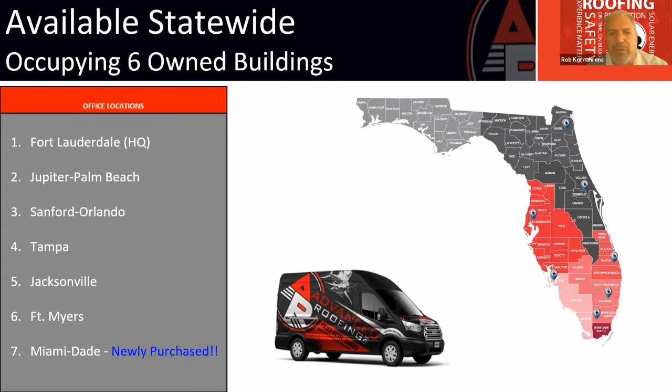Good morning, everybody. My name is Dan Huntington, and as Robert said, I'm going to be talking to you guys about OSHA requirements in rooftop fall protection.

A little bit about me. I like that Robbie's from Long Island, New York. I myself am from Buffalo, New York - we call it the frozen borough. I've been in fall protection for about 10 years, coming up on 10 years. And the majority of my time is spent up on roofs, identifying hazards and coming up with solutions. There's a lot of consultants out there that are able to say, hey, you've got a hazard. Well, yeah, no doubt - how do I fix it? Right. So that's what my focus has been: what does OSHA require, and then what can I do to address that hazard? And we're going to talk about that today.

A little more about me. I've gone through pretty much every OSHA training regarding fall protection that I can find. I have Train the Trainer awards, IOSH certifications, and training in work at height risk management and work at height rescue. I've written articles published by OHS Magazine, EHS Today. I host an annual webinar like this one for EHS Today. I was a speaker, a virtual speaker at the 2020 Western Roofing Expo. And I've been tasked to work as a professional, or an expert witness, in a fall protection case most recently. So I've been in fall protection for a long time. This is my passion, and I'm excited to talk to you guys about it.

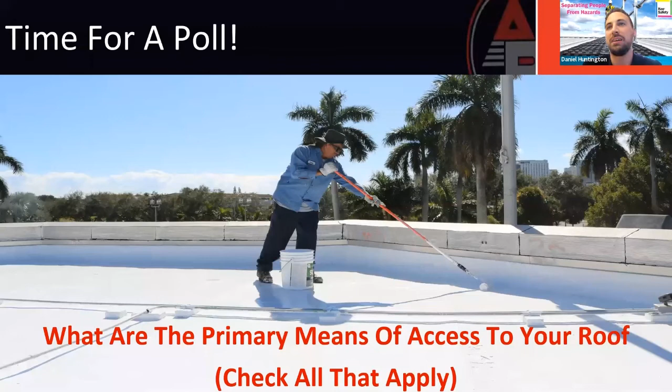But first, we want to send a poll out to you guys. What are the primary means of access to each of your roofs? Are you getting up through a hatch? Are you checking, going through exterior fixed ladders, stairwell penthouses, or hot air balloon? That's very clever. So pick whichever one applies and let us know in the polls.

Once we get the data back, what I want to say is most people use hatches and fixed ladders, some stairwells, which is exactly as I would see it. It's typically split between fixed ladders and hatches. But what does OSHA have to say about those fixed ladders and those hatches? That's the real question.

Let's break it down. It says that each employee must be protected from falling into a ladderway floor hole. What is that? That's a hatch, right? It's where the floor or the roof is acting as a floor that you're going down below. So if you have a hatch as your access point and you don't close the lid, because no one ever closes the lid since we don't want to get locked up on your roof, it has to be protected. We'll talk about how.

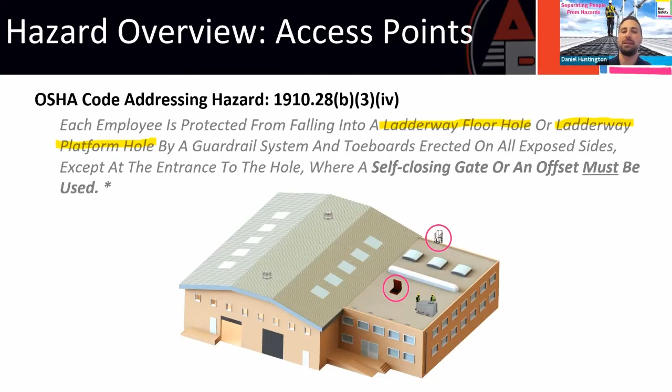But the real question you guys have is, well Dan, you've been doing this 10 years and you're saying that this is the number one priority, I need to protect this one first. What about the leading edge, right? Well, we'll get to the leading edge, but first, let's understand how we even talk about risk.

Yellow is moderate, red is critical. I am focused on critical hazards in this presentation.

Let's think about fall protection. Any hazard is going to be a 5 on potential severity, okay? In general industry, the minimum threshold for a fall when fall protection is required is 4 feet or higher. You guys are probably thinking, no, you're wrong Dan, it's 6 feet. It's 6 feet in construction, 4 feet in general industry.

So let's say you have a fall that occurs at 4 feet high. You're a 6 foot tall person, your head is 10 feet above the ground. You fall backwards and land on the back of your head. That is a potentially debilitating injury. So even at our lowest threshold, we're at a 5 in fall protection all the time.

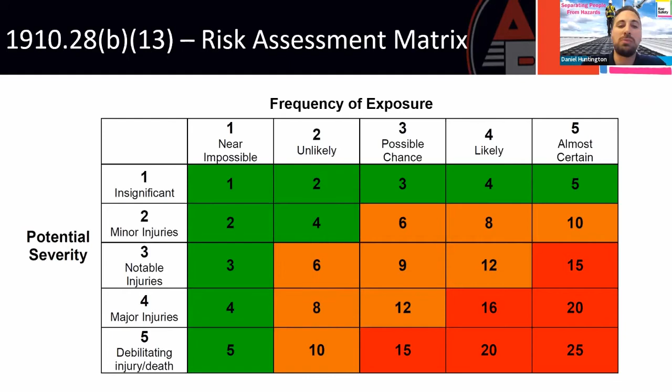So the question becomes, what hazard on the roof am I exposed to most frequently? I'm going to give you guys a quick example here. You guys can pick it apart if you want, but just go with me. Our primary access point is going to be that hatch, and on separate occasions I have to service this unit twice per year.

I have to change out the belts in that exhaust fan. 4 times a year over at this exhaust unit near the roof edge, I need to change out the filter, so that's 4 times per year, separate trips. Twice per year I'm cleaning out those drains - one's in the spring, one's in the fall. And then once a year I've got to go up and recaulk those skylights, because skylights are always causing problems. So the question is, which hazard am I exposed to the most frequently?

I've done this example hundreds of times. Sometimes people say, well, the edge right here, 4 times - that's your most frequent hazard. Yep, I get it, but it's not the right answer. Some people are aware enough where they read the title up here that says access points, and they say, oh, the access point must be the answer. And they say, yep, that's correct.

But what's my exposure count? How many times am I going up? 2 plus 1 is 3, plus 4 is 7, plus 2 more is 9. Oh, I'm going to be exposed to this 9 times. No, you're actually going to be exposed to it 18 times.

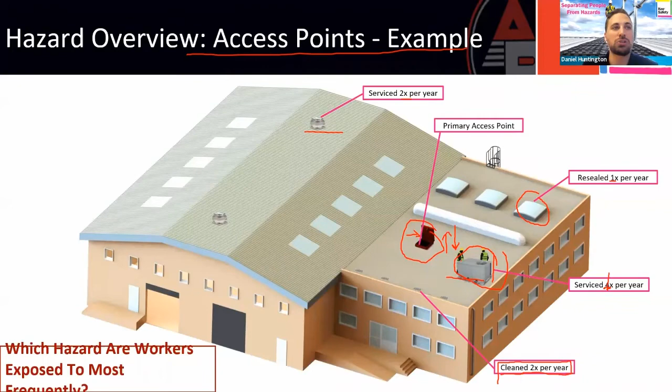Now there's one more thing we have to clarify here, and this is for our OG OSHA aficionados. The question is, can I use chains to protect a ladder opening? I see it all the time walking through facilities and plants where people are saying, hey, I don't need to put a self-closing gate on that access point - I've got a chain up there.

OSHA says that chains are at least as effective as a gate. The answer is that that's not true anymore. Back in the 80s, OSHA wrote a letter of interpretation saying they believe chains provide protection at least as effective as a swing gate, and so you could use a chain instead of a swing gate.

In this new code, 1910-28, which came out in January of 2017, they use the term self-closing gate. You have to have a self-closing gate to protect your opening. So if I have a self-closing gate, can I still use a chain? The answer is no. Their explanation, straight from the Federal Register, says OSHA believes that double chains do not fully protect workers from falls at hole entrances, and is therefore adopting the requirement that platform holes have self-closing gates or be offset.

So think about how you're getting onto your roof. Think about any ladder in your facility. When you get to the top of that ladder, or to the top of that hatch, what does it look like? Is there a gate at the top? Is there guardrail on either side? Is there railing around that hatch? If the answer is no, it needs to be addressed. It is a critical hazard that needs to be protected on your roof.

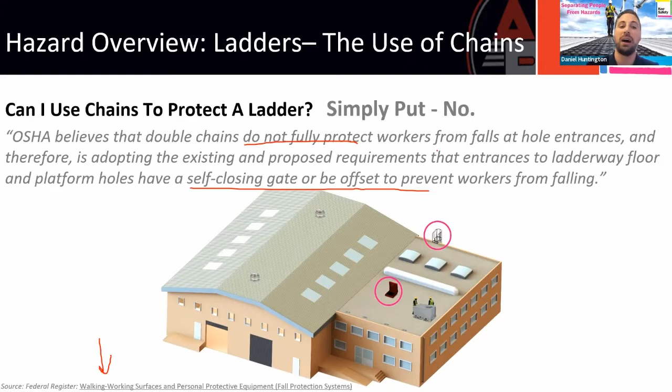So the question becomes, how do we protect it? Very simple - we provide a solution called Kee Hatch, available through Advanced Roofing. They know all the details needed to safely install it, attaching it to your hatch without voiding your roof membrane warranty, without poking holes in your roof.

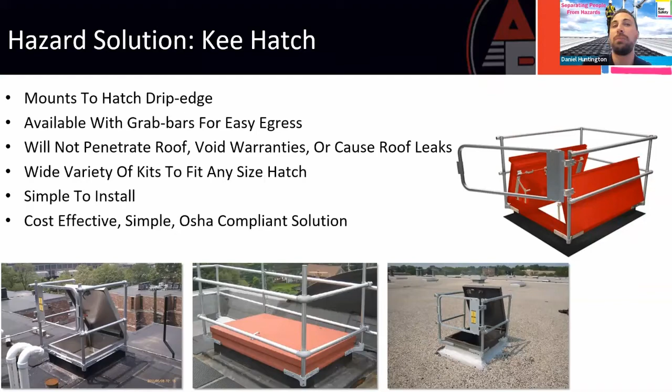If you have a fixed ladder, how do we address that? Again, very simple - we have a guardrail system that protects either side of the opening, with a self-closing gate in front of the opening, and a guardrail that won't poke a hole in your roof or void any warranties. This is also available through Advanced Roofing.

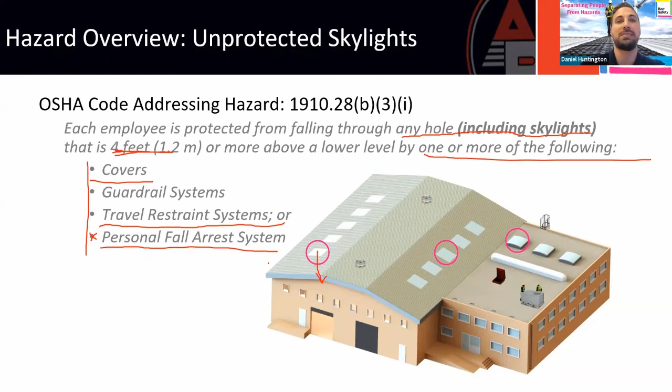So when it comes to protecting skylights, the best options are a cover. We provide a screen as your cover, so we allow light to get in. Again, we provide non-penetrating attachment to the curb—we don't put screws into your curb, because we don't want to damage your waterproofing. That's why it's so critically important to work through somebody like Advanced Roofing to make sure these are put on properly.

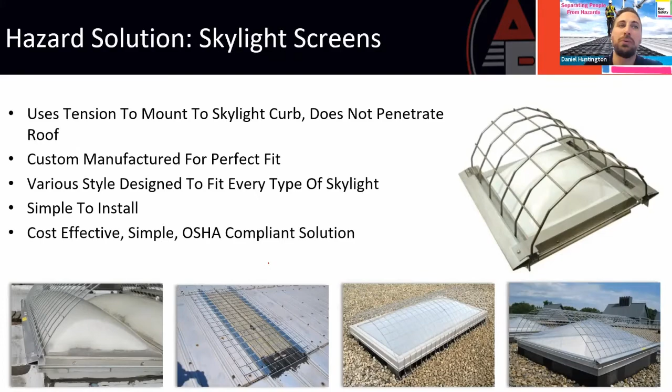Or a KeeDome railing system that goes around your dome skylights. The railing goes around the skylight, so it's not a cover—it's protection around it. A lot of times people will upgrade to this solution when they're worried about shading. So if you have a foyer or an open skylight over an entrance into your building, you don't want that grid pattern shading on the floor as light shines through. So you just put a guardrail around it to avoid that shadowing on the floor. But either way, both are a great option—both are OSHA compliant to protect workers from falling through your skylight, which again is statistically more likely to happen than falling off the edge.

So thinking about your building—we have 60% of you where it doesn't matter, you don't need to worry about this. The remaining 40%, especially that 20 or so percent that had more than 12, think about the skylights on your roof.

Think about the proximity and work that you have. Think about the walk paths on your roof. Are you opening yourself up to potential liability of somebody falling through that skylight and being seriously injured? So it's a moment of reflection to think about your site.

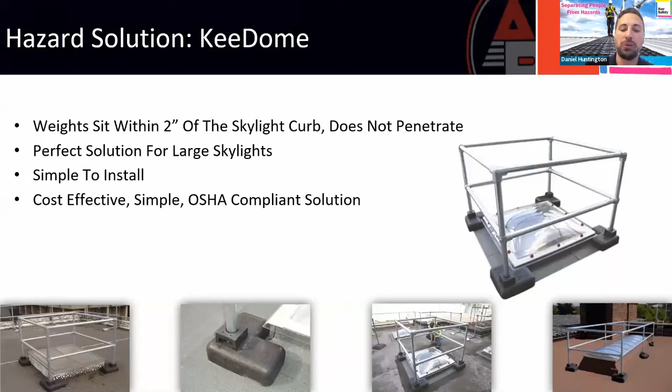Moving on, this is the number one question people ask me to protect: the leading edge on your roof. People are always wondering, on the roof, what should I protect? Who do I need to protect? What solutions can I use? And I'm always saying slow down. How are we going to get to the edge first? How do we get onto your roof? What's the path to get to the edge of the roof to service that equipment?

Let's look at the code: 1910.28 (b)(13) subpoint (i). This is when work is performed less than 6 feet from the edge, what I just delineated as a critical area on your roof. It states in the code that the employer must ensure that each employee is protected from falling. And then they give us 4 options in this zone: guardrails, safety nets, travel restraint, personal fall arrest. So it's very clear, if you have somebody working 0 to 6 feet, you've got to protect them using something.

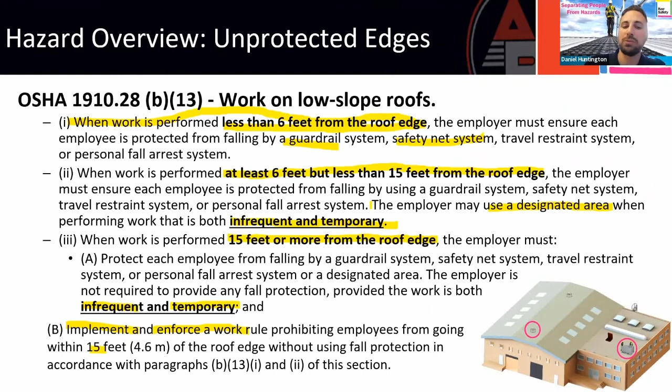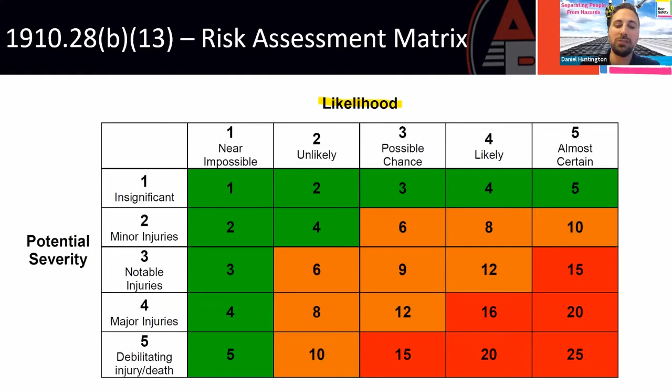But we still have some terms to define. We've already seen this graphic, looking back at our risk assessment matrix. Tying it back to what we talked about in the beginning, this term 'likelihood' is what everybody gets tied up on. If we simply switch 'likelihood' with 'distance from roof edge,' it's simple — the closer I am to the roof doing my work, the more critical it is as a hazard, and the higher it is on my priority list.

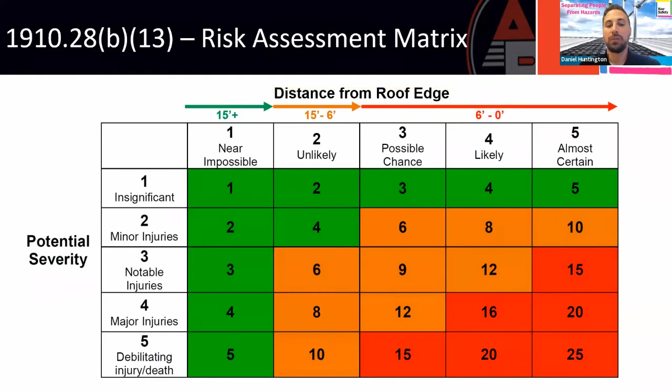So if you bring me in and ask, Dan, what do I need to look at here? I'm going to say your access points, your skylights, and any units within 6 feet of the edge. That's the bare minimum we need to get done right away. In those areas, you're one accident away from a severe injury, and you're leaving yourself open to huge risks when it comes to lawsuits.

Required definitions: temporary and infrequent. If your task is temporary, it takes less than 2 hours according to OSHA. Infrequent is typically considered quarterly — I think monthly is very frequent. So typically quarterly; if you're going up on your roof more than 4 times per year, it's pretty much frequent.

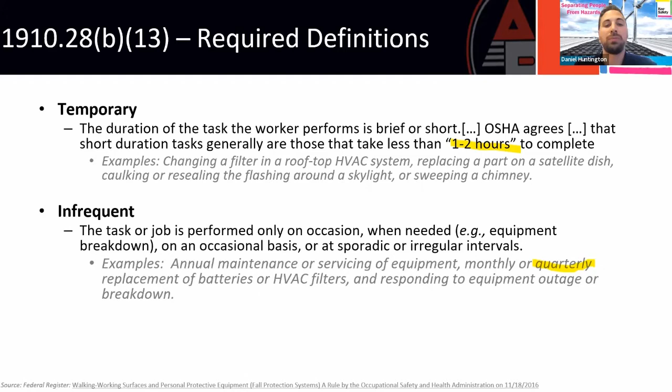As far as solutions are concerned, we have a railing system that will not penetrate your roof to protect those edges, meeting the OSHA requirements for guardrail. Everything we do is hot dip galvanized inside and out. Florida is an extremely corrosive environment, so we only use the best possible solutions for corrosion resistance to meet the quality you're getting on the roof from Advanced.

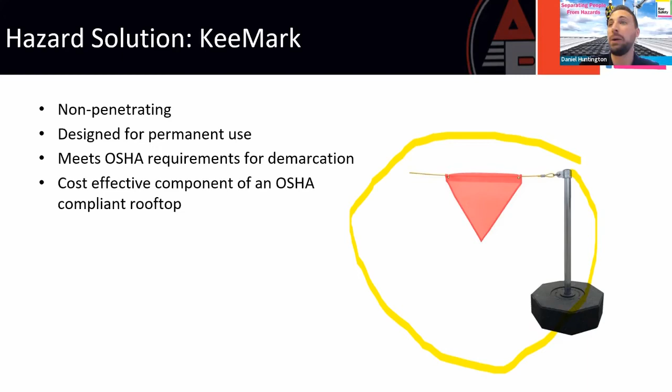When it comes to designated areas, a simple warning line is very easy to put up, minimum 6 feet away. I actually recommend putting it 10 feet away. At 6 feet, if a guy who's 6 feet tall falls against it and takes 2 steps on his way back, it's not really going to do anything. So technically we're meeting code, but that 6-foot distance from the edge is really a bare minimum.

And if you decide to go with anchor points and lifelines, a good alternative to a full engineered system mounted into your structure is this simple non-penetrating anchor point set up on your roof. I like to use these in areas where, hey, all my units that I'm servicing have guardrail around them, but there are certain areas — maybe cameras or lights on the edge — that I only need to service on occasion. We have this on the roof and you can move it around to the places you need once a year. You just leave it up there and you can move it. You set it up behind the 15-foot mark, tie off to it, and go beyond the 15-foot mark — that's a good way to design it.

So as far as your primary needs to protect on your roof, these are the most critical areas.

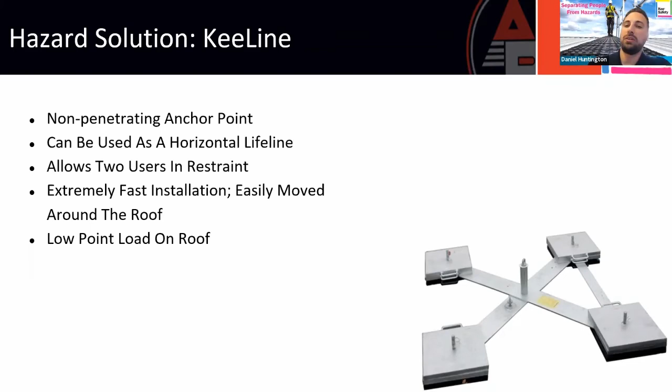I'm going to spend about the next 5 minutes going through the next step, which is, okay, once we've protected these critical areas, what do we do next? The answer is, well, what do you do when the roof itself is a hazard? We talk about obstacles on a roof.

Thinking about a roof, it is covered with trips and slips. In fall protection, we talk about falls, but that's only one third of slips, trips, and falls. So if you think about walking through your plant, you're going to have a designated walk path. Any lip 2 inches or greater, you're going to have it highlighted yellow, with a little ramp there so nobody trips.

Then all of a sudden you get up on your roof and you've got conduit crossing your walk paths. You've got raised bed ammonia lines. You have HVAC equipment that you're going up and over or trying to duck under to get across your roof. Or you're walking on sloped roofs, and they're metal, they're slippery. So the question becomes, what do we do when the roof itself is a hazard?

For this, I pulled out the general duty clause from OSHA, which is that we have to provide our employees with a place of employment free from recognized hazards. And trip hazards are a clearly recognized hazard. So I don't rank slips and trips in the same area as falls. That's why I said, protect your falls first, and then let's talk about slips, trips, and obstacles.

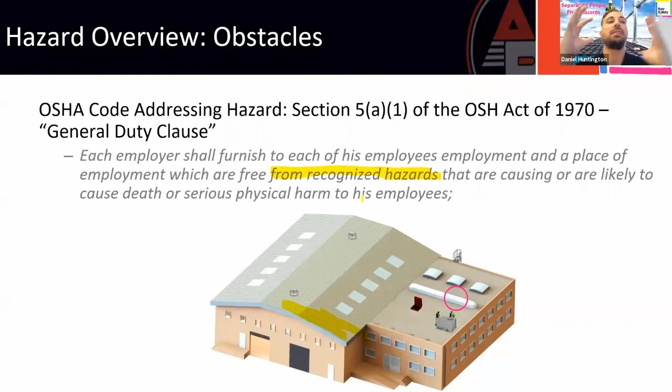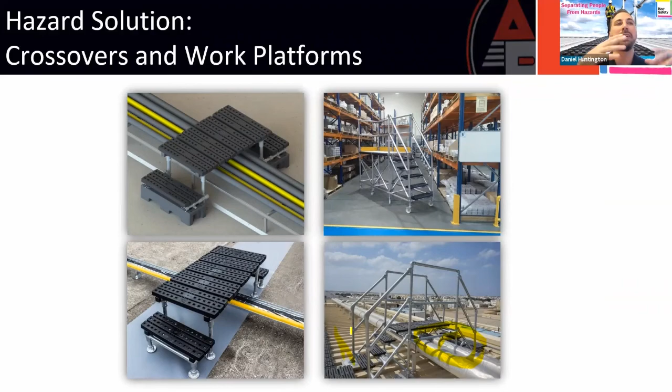As far as solutions go, it's all customizable. As your advanced roofing expert is walking across your roof, stepping over things, he may say, you're getting a lot of damage on this HVAC ductwork, losing efficiency on your heating and cooling systems. Instead of replacing that, let's get you a bridge to get up and over it without causing damage. Or on your sloped metal roofs, we can see you're starting to open up areas because of foot traffic. Let's try to get a walkway across that roof to stop that damage from occurring. So don't be surprised when a professional comes out and recognizes these hazards or issues.

And you're saying, wait a minute, we're not near a skylight, an access point, or an edge, why are we talking about it? It's because it's all about holistic safety. It's looking at your roof as a holistic area that needs to be protected.

I always encourage, especially safety professionals, as a way to wrap up, your roof is a workplace. Think about your roof the same way you think about your building. I'm always surprised at how many facilities I walk through where safety is everywhere - you can't walk into a certain area without hearing protection, eye protection, beard net, hair net, and you can't walk off a delineated walkway because you could be exposed to a hazard.

Then we get up onto the roof and it's just wide open - there's no visible safety anywhere. I believe it's because it's out of sight, out of mind. As safety professionals, we walk through the plant and recognize those hazards, but getting up on the roof, we do that less frequently, so it's not as visible as a hazard area.

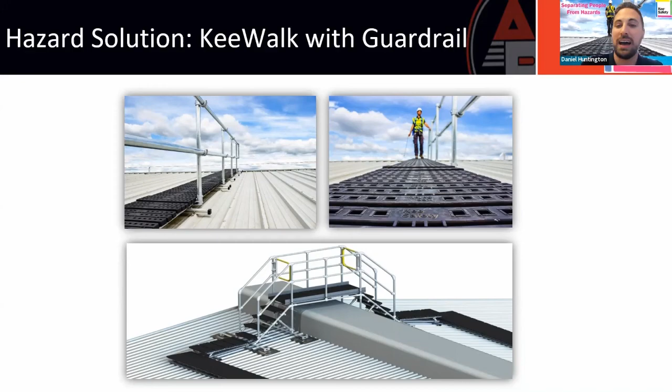And it's because as safety professionals, we're not up on the roof looking at potential hazards until after an accident occurs. That's my last encouragement before we open it up to questions: think about your roofs as a workplace, as a potentially hazardous area with workers, and think about what you can do to have a professional come out and identify issues through our free 15-point safety inspection. I think it's critically important to come up with a plan and have a plan. So I'm going to end it there.